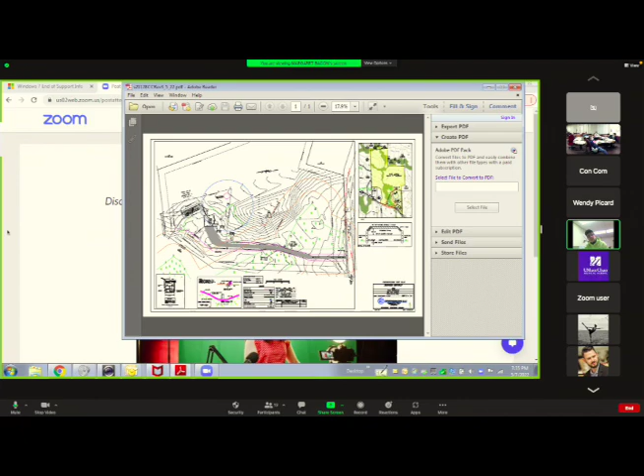So anyways, we revised the plan and moved the septic a little further away from the buffer zone, made the house smaller, and adjusted the erosion control. I think that was basically most of the comments the commission had last time. Yes, we ended up walking this site - the cart path is good, and we moved and shrunk the house and shifted the septic away from the buffer. It wasn't based on your comments, it was a design change for other reasons. Are we keeping the man cave - the well house? Yeah, still there.

Okay, we can't really hear you Margaret, you're breaking up. This is a public hearing - anyone in the audience have any questions or concerns regarding 280 U?

Board, any additional comments? I'm not seeing any comments. Mark? Do you want the bigger one? Go for it. Lady Grace, anything?

Everything look good, Mark? All right. No comment. Okay.

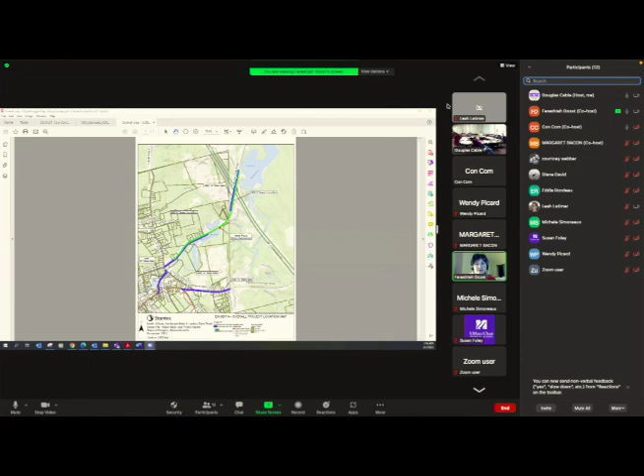Okay, so I'm going to just talk about the overall project. This is the USGS map of the town of Douglas and Uxbridge. Sorry, no, we're not seeing it. Do you think you have it on your other monitor? There you go, you can see it now? Yes, yep, thanks. Okay, so the blue lines are the water main.

The red line is the pump station, and the green is the force main, sanitary force main. So we're going to have 2,600 feet of 6-inch force main on Gilboa, and on Lackey Dam Road about 2,600 feet of 12-inch water main - that's new water main, no replacement. In the other area, there are small pipes that we're going to remove and replace with bigger pipe, but this area is new water main, and the green is 4-inch force main, about 3,400 feet, plus about 600 feet of gravity.

So this is the overall project area, and I have the detail of the design. If you're interested in any location, we're going to go into detail on those. These are all the water main remove-and-replace sections in the street with the hydrants and service connections. This is North Street. This is Northeast Main Street, again remove and replace of the existing water main, and the areas of wetland that we marked - if you have any questions or want to zoom in, Michele is going to talk about those later.

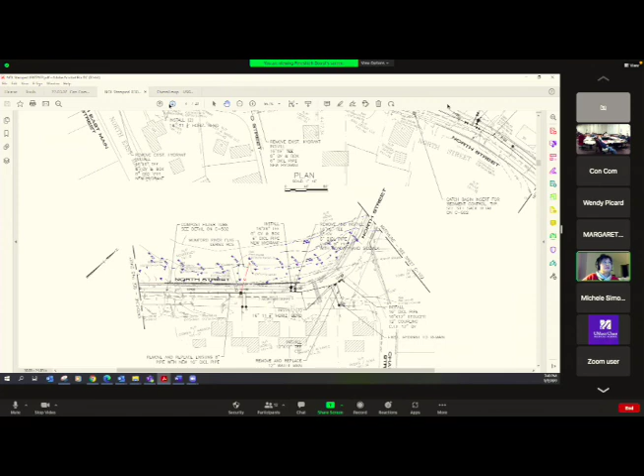If we could focus on the jurisdictional areas and the DEP comment areas, that would be great - zooming in on the applicable portions of the project. Okay, so Michele, first if you could just go back to where you were. Okay, then we come back here and I send it to you, right? If you could just show me, just go back to the Northeast Main Street that you were just showing them - we'll just start there.

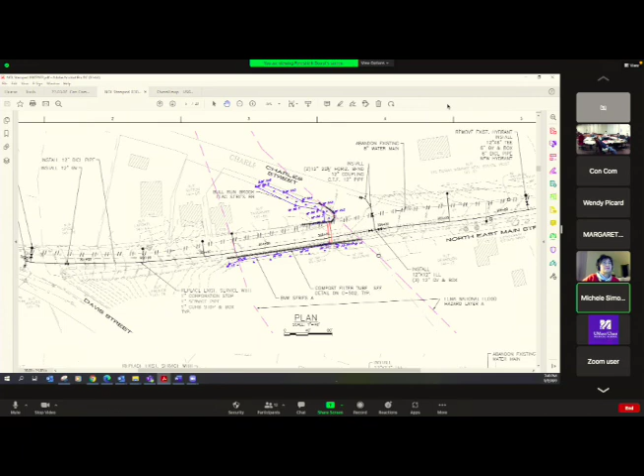Okay, so the best way to describe this is this area is just roadway work for the water main. But it is part of the notice of intent filing because it's within a FEMA National Flood Hazard Layer A, which doesn't have a base flood elevation, but it does overlap the work in the road.

While we're in this section, that's just work in the roadway with a cut and cover. Mass DEP's comments when they issued their file review was that the sedimentation control appeared to go down the bank through the river and over the other bank. That was just a little bit of a CAD error, so we adjusted that to show our intent was not to do any work in the resource areas, and that the sedimentation control will just hug the roadway and be between the resource area and the work in the roadway.

So these are revised plans that we are just presenting to you this evening. We sent them to you just a little while ago.

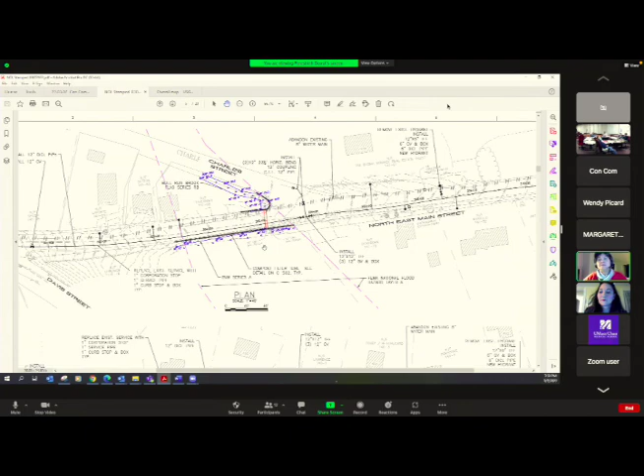Okay, questions about that section before we move to the pump station parcel? Should I move to the pump station? I just wanted to check, no questions about that area? No, okay.

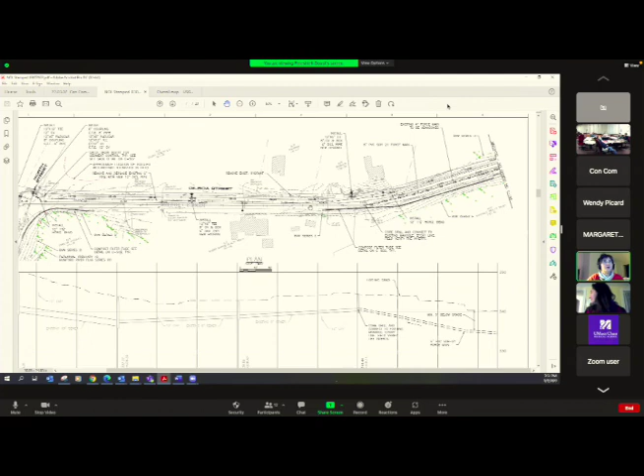Okay, so I keep going. This is Gilboa Street. We're going to connect to the existing water main and replace the water main, and then the force main for the pump station is in this area.

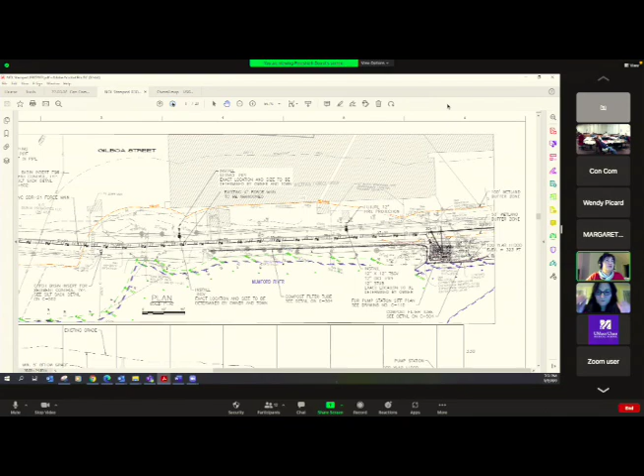Everything we did in the road, we show the profile for the pump station and sanitary sewer. Again, the force main comes all the way to the next sheet to this pump station. But since this is really small here, we zoomed to another sheet for a closer view. So this is the existing site of the pump station.

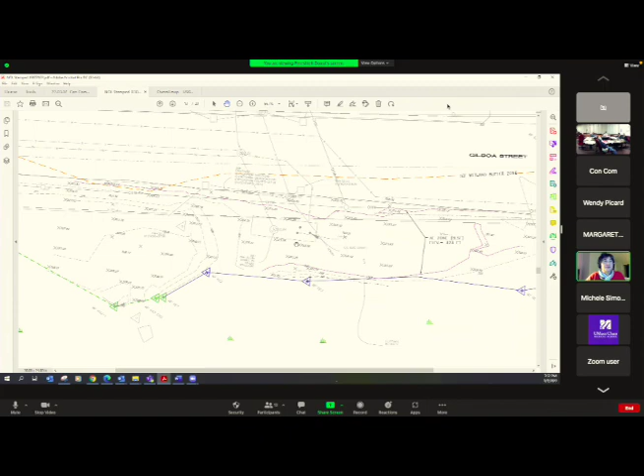Right now they have an underground pump station with electrical and control panels. We're replacing the existing pump station with a new one-lift pump station with duplex pump, control panel, and generator on the same site.

And this is the site plan for the pump station. So the existing pump station is here, and we're gonna put a new pump station. Again, these are one-lift pump stations, so we dig the hole, put the pump station in, and do the site work around this.

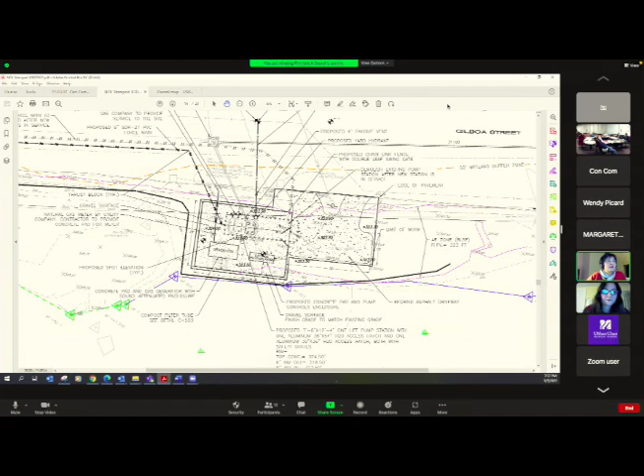The 100-year flood elevation is up here and down in this area. So in here, to make sure the pump station doesn't get flooded, we have it at elevation 324.5. So when the area gets a 100-year flood elevation, the access hatch to the pump station would be above the flood elevation.

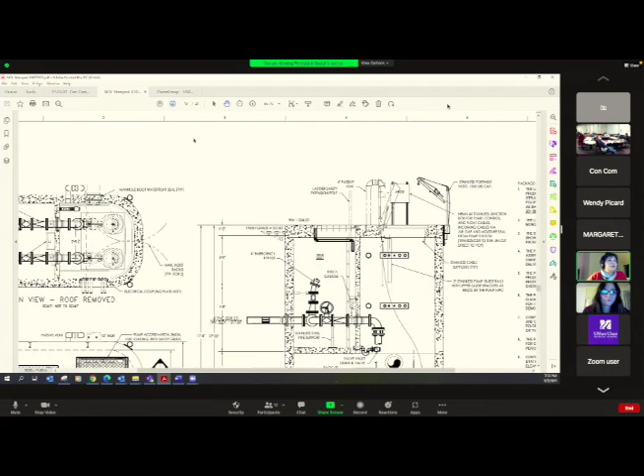And I'm gonna go here, this shows the pump station, the pumps, valve, and bypass pumping. And what you see would be only like this, this is the existing.

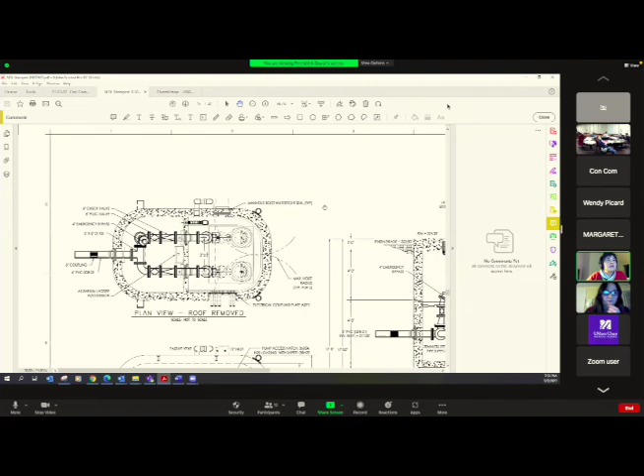This line here is existing elevation. Right now it's 323.8. We're gonna have this 8 inches above that, so the water doesn't get to the pump station during the flood. But everything else is underground. It's precast concrete, everything's all set, tested, and they bring and put it in there.

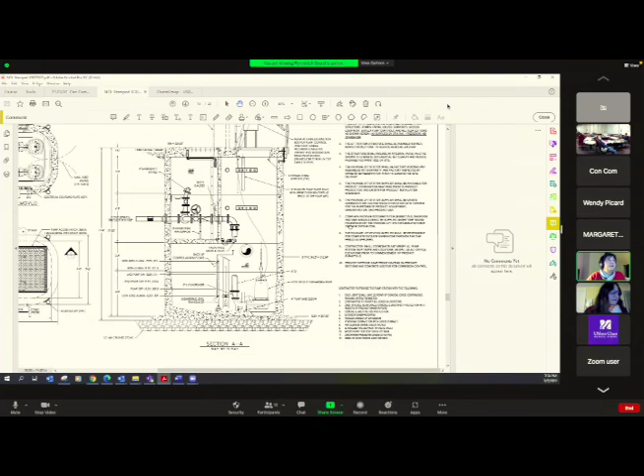This is all in a building though, is it not? No, no buildings, all underground.

If you go back to the last slide, can you tell me what the big square is that's around the whole generator? Oh, this is the generator, we're gonna have an above ground generator. And this is the control panel, and what you see around it is the fence. We're gonna fence the area and there is a gate. So no building.

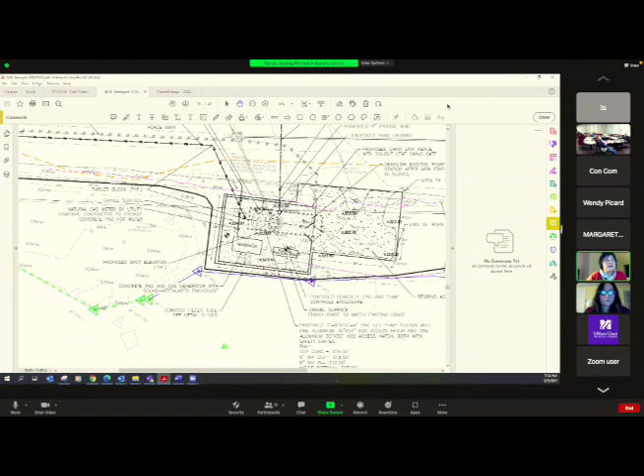Yeah, and that was one of DEP's comments, just to clarify that. Would you like me to read the Mass DEP's comment into the record, Madam Chair? Sure, okay.

MassDEP's comments on their review letter stated that the project narrative mentions 144 cubic feet of permanent loss of storage in bordering land subject to flood, BLSF, and asked us to update the impacts listed on page 3 of the NOI, providing additional information on how the project conforms to 310 CMR 10.57 subsection 4 performance standards for BLSF, including compensatory flood storage under 310 CMR 10.57 4A. Our response was that, for lack of a better description, we had a typo in the narrative.

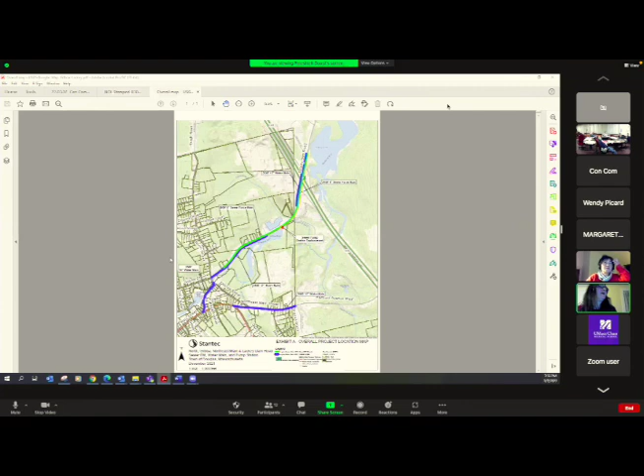The narrative was presented incorrectly, so we want to clarify here in the public hearing that there is no fill proposed in the BLSF. Luckily in this area FEMA has a base flood elevation, so we know with certainty that the BLSF is at 323. There's no proposed fill in that area, so no compensatory storage was needed. We verified that in our memo, and the plans you're looking at are our revised plans, showing the 323 contour and that our work is outside the BLSF with no permanent fill.

But there is grading and there is a new driveway, it looks like. Is that a paved driveway? And how close is that to the wetland?

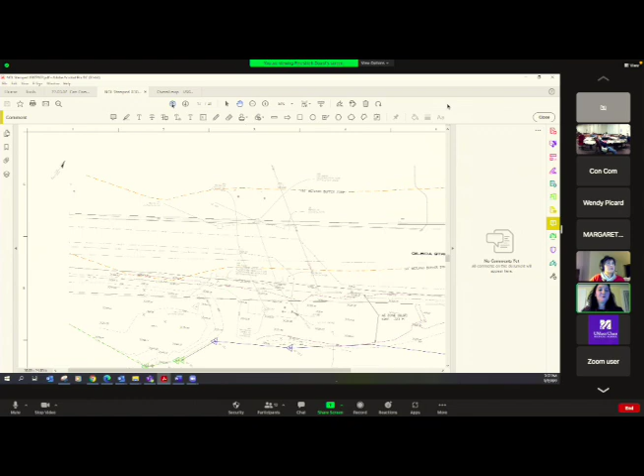Sure, Christian, can you zoom out? I'm going to give a bigger overview of the resource areas we're dealing with here besides the floodplain in this area. Can you zoom out just a little bit more? I just want to give an overview since we zoomed in quickly. Okay, that's a good place to start. So you see that dense black square there? That's our pump station, and what you're seeing here is the Mumford River in blue.

There's a portion of it that is impounded, so it's just got bank and a little bit of bordering vegetated wetland in places, but below the dam it resumes riverine characteristics, so it has a mean annual high water line, which sets the 200-foot riverfront area. That reaches across Gilboa Street onto the next parcel, and there's actually an overlapping riverfront area. Can you page to the next sheet down, please?

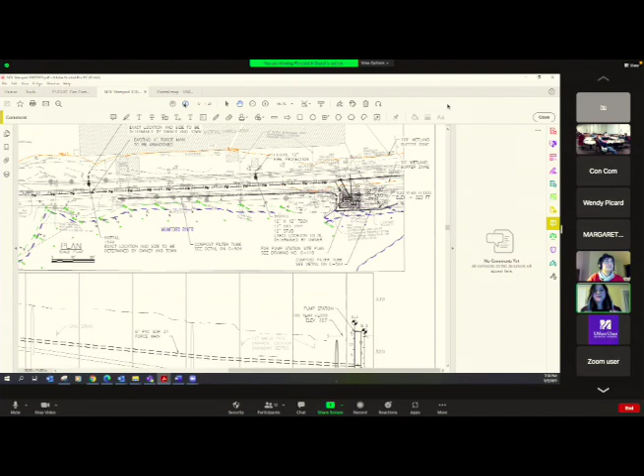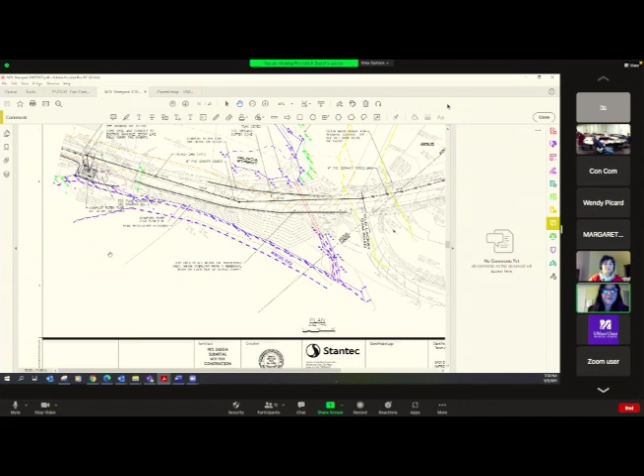There we go. You can see a portion of Gilboa Brook runs through, so there's a confluence of the riverfront area. We're definitely in the riverfront area for the pump station, and I showed you where the BLSF is, and then there's of course a 100-foot buffer zone to the bank of the Mumford River. So that's where we are on that parcel. Mark, does that answer your question?

So as far as the additional or expansion of disturbance in that area, what does that entail? Are we considering this a temporary disturbance? No, I think the parking area is permanently associated with that site. I think that's Mark's concern. That is my concern — right now there is a parking area.

I'm looking for any additional expansion of that parking area. This is where they drive and park to do work at the pump station. Right now we're proposing a regrind asphalt driveway for that area. It would be easier for the town to plow and just park there. It's about 10 feet, maybe, away from the river in this area.

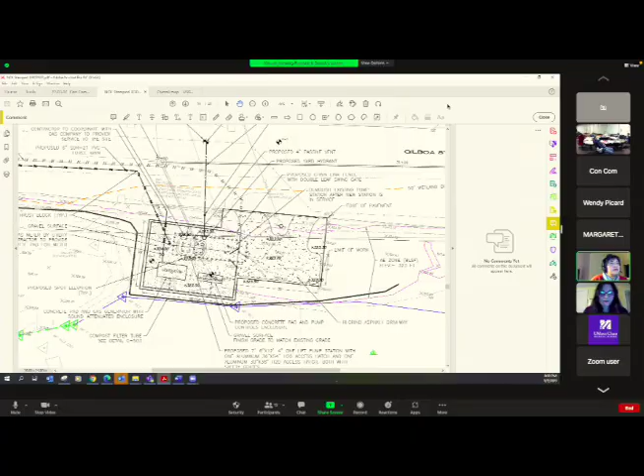So is the existing driveway or parking area getting expanded beyond what is currently disturbed? No, it's just the same type of footprint. We're going to leave that — if it's a grass area or dirt, we're not going to touch it. This area stays all the same; just where they come and park the car, the town would like to have a regrind asphalt driveway.

And at the pump station site, we're going to put a gravel surface — picking up 12 inches or 8 inches of soil and putting gravel down, so it matches the existing grade. We're not going to fill any area. Is that completely within the fence? Yes, just within the fence. Outside the fence it's going to remain as is, with some grass area and natural vegetation — we're not going to touch that, just put the gravel within that area.

So is that called out on any of the plans? Yeah. Is there a detail of the regrind — is that C110? Yeah, I've got it here, I think. So do we have a big set? Mark, there's a big set there. If you go to C110, you can see the site plan for that. It's hard to tell the existing versus the proposed.

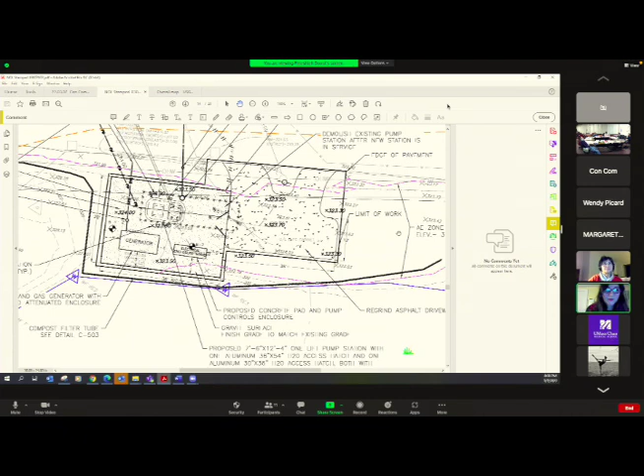We did include a stormwater management checklist and plan stamped by Gina Britton, who's the professional engineer, the engineer of record on it, attesting to no further runoff. We haven't proposed any proprietary swales or anything like that to formalize the area.

And I do have the numbers for you. So for riverfront, again there's no BLSF impacts, but there is a disturbance of 3,700 square feet to the riverfront area, and that would be inner riparian zone disturbance, that would be the riverfront areas to Mumford River.

Okay, and the alternatives analysis was submitted? Yes. Okay, and DEP obviously did not have an issue with that, so that's good. One thing, the Thresher can cover this in more detail, but this new pump station is an upgrade with new technology, and it's going to have protections, it's kind of got all the updated engineering for resiliency, when it comes to protecting the town's pump supply. And Percy, can you speak to that a little bit more?

Yeah. This is the pump station we're gonna use. This is the precast pump station, and it's gonna be waterproof, and the pump's gonna be in here, and the pipe with the force main. The only thing you see out there is that 8 inches above the ground with the access hatch and the vent. And for removing the pumps, there is an access hatch.

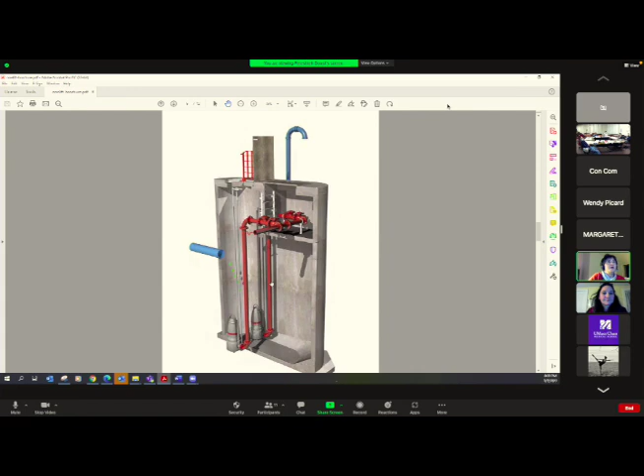So when they drive here, the truck comes back up, and if they have to remove any of those pumps for repair, they can just pull it up and drive back and take it to repair.

And this is, the old pump station, the pipes are very old, the pumps, and with lots of new warehouses in the town that they need water and sewer, so those pumps could not pump the sewer. So we replace it with bigger pump and generator backup and the new system pump station.

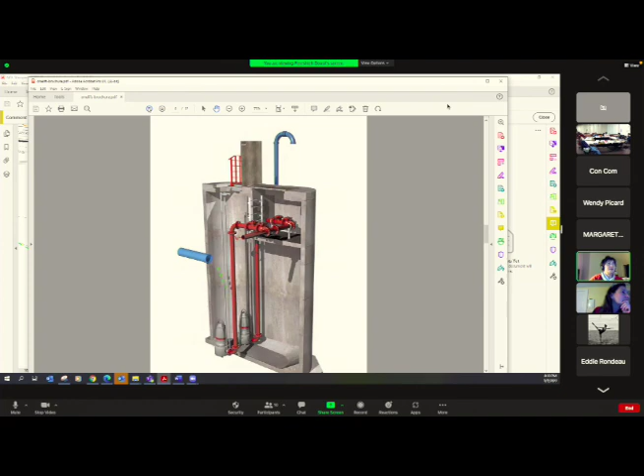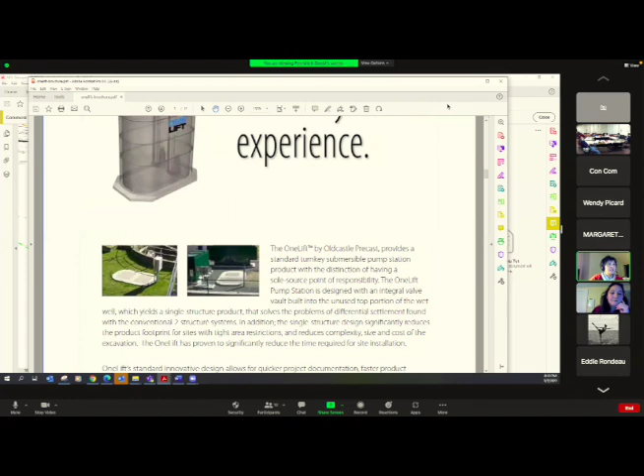And that's gonna be OneLift pump station. That's gonna go in there. Everything will be underground. Then what you see would be just the hatch with control panel. This is another project, of course, but that's gonna be what you see outside.

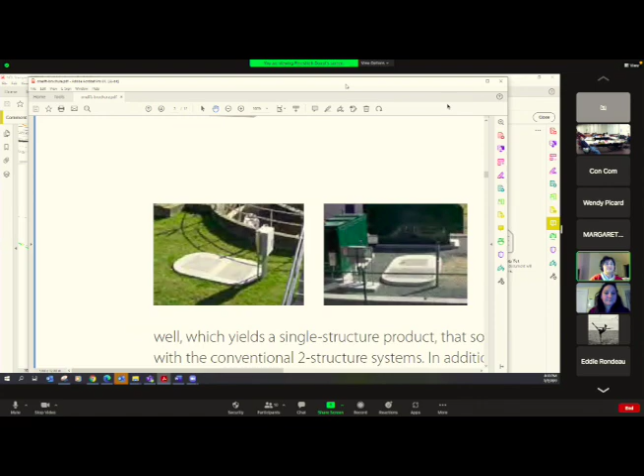Okay, so as far as the increase. And this is the detail. The increase of the impervious within 10 feet from the bank. Can we go back to that? So your justification for that, yes.

My understanding is that the water and sewer department would just like that for sort of a formal area to park, to maintain, for easy access and egress back out onto the road. It is a pretty busy road. Exactly. It was hard to put the gate in here for the trucks to come and back up because it's a very busy road, and that's what they use, and they own this lot.

So this is per their recommendation that if you can use the regrind asphalt, so when the truck comes, their pickups usually, and turn around, it would be a nice area to park, check on the pump station, and have the gate. Right, so it's a 13 by 35 foot. How many people are going to be checking on this pump at one time? It appears as though it's a parking lot.

So I just want to understand, in accordance with the Wetlands Protection Act, what is your justification for getting so close with regrind versus today it's a very small gravel area? Yeah, in case they have to come and check on the pumps and maintain the generator or electric control panel, usually someone from the town definitely needs to come open the access hatch. But does it need to be so wide? The electrical engineer from our office or someone else's, and mechanical for the pumps.

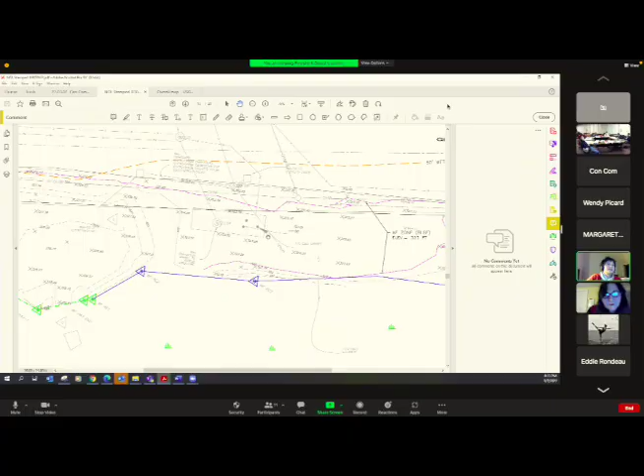This is the existing, and again, we don't have any places to show that area because it's just the dirt and existing. This one is gonna be like. Well, you showed a picture of it. You want to bring that up? Yeah, I was gonna suggest the same thing. Bring the picture up. This.

I've been to the site. The main water line and bank is right down below the tree line, where you can see that's a fairly steep bank. And just back to your question about concern over the say like a crushed stone versus the asphalt, the regrind asphalt that's being proposed, the thought is just that the maintenance that is accompanied by the crushed stone and just kind of having to continually maintain it, possibly getting pushed closer to the river. There will be a fence there, but that's just what the town wishes to do. So that's what we proposed to make the operation go as smoothly as possible.

Okay, so how are we protecting the bank from the runoff? And why is the parking area so large, for probably 6 cars to park there at one time? Now, is this also gonna be fully enclosed with a gate?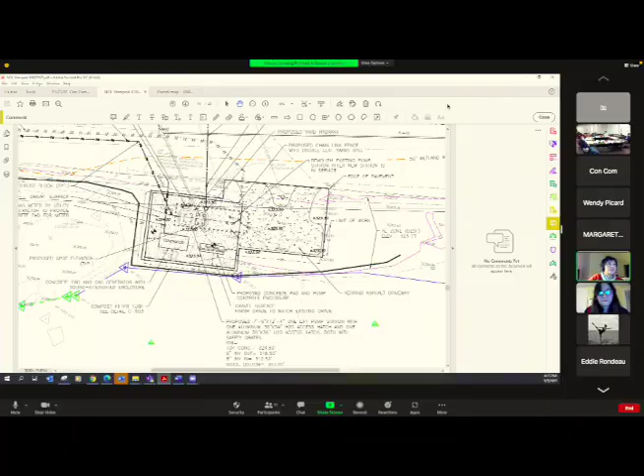With a double gate? Yes, this gate will be closed all the time. So the parking area you're referring to is not gated, is not fenced in. So anyone could park there if it looks attractive. Well, exactly, I can tell you they all park there now.

So that's actually where all that worn out area is mostly from other people parking. They pull in and they actually drive further down, closer to the area. And that's why.

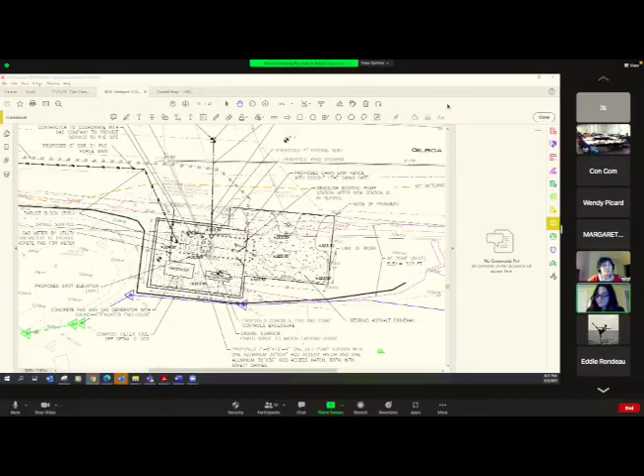There's a catch basin right on the road. And the road is curved, so you have to hop the curb to get into this driveway. There's no curb currently, neither off the side. Oh, okay, it was designed to be maintained from the road.

So you want that berm along the road to stay there - like 4 or 6 inches. And then around this area, you need a berm also? No, not along there, just on the stream side, parallel to the river.

We'd like to keep the water from going directly off the parking area towards the river, to prevent erosion and get some filtration before it reaches the river, for whatever reason. We'll have to look at some kind of swale and look at the grades.

So we can grade this to go to that catch basin - is that what you want? No, we didn't say that. I was just saying there is a catch basin there, and if you can use it, sure. But we're also saying it would be okay for the water to go towards the east, just off the end of the parking area. I would probably recommend towards the east because that catch basin goes directly to the river. I wondered that.

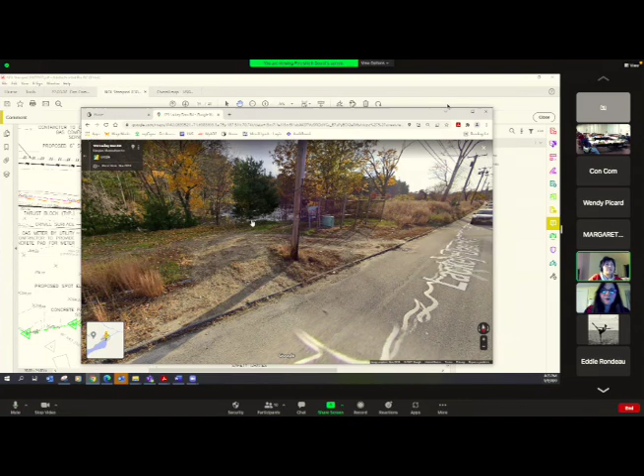Shrubs or anything. How do I know that, looking at that plan? Because I don't see any of those trees on the plan. How can I be confident of that? Because those trees are outside the limit of work. Yeah, but they don't show on the plan, and the river is right there. I don't understand how they can be outside the limit of work, when the river is 5 feet away from the fences.

Sean? It is a little tricky to the eye, that picture, because it's a very steep slope, so some of those trees are kind of like right at the edge, and then a little bit down towards the river.

Well, can you add those to the plan for us, please? We can approximate it, sure. I don't want an approximation, I want you to add those trees to the plan. Well, or she could do all existing vegetation to remain in these areas and make a note.

I think you were saying the area of disturbance is not affecting any of the vegetation in the immediate area. But you could even do like some kind of call out for labeling and say there's no, but you could also put on the plan, no tree clearing, no vegetation clearing, as a note. And that could be a condition also. The survey just didn't pick up the tree line in that spot, so, but yeah, absolutely put that kind of note here.

Question. All right, my next point is that on the eastern corner of the fence, it seems like it's hanging over the bank towards the river. Is there any way that that fence line can be moved away from the river bank?

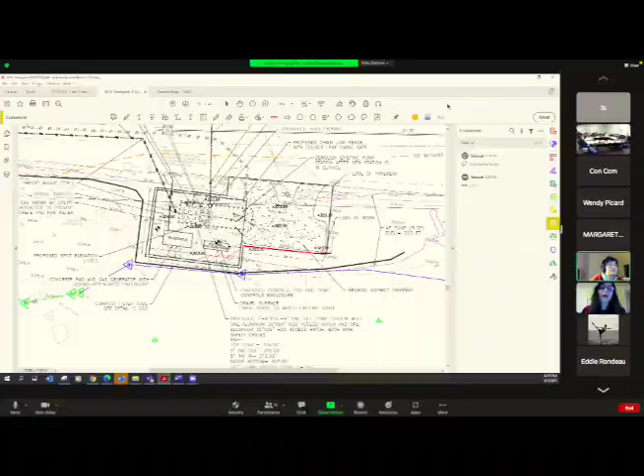Is the fence allowed to have like a little jut in it? So I was about to say, can you angle the fence at 45 degrees in the back instead of squaring it off? Yeah, that's what I'm wondering, if that's allowed. Just come across on an angle to where the gate opens. Sure, something like this. Correct, yeah, right. I thought that was a code thing. It probably is.

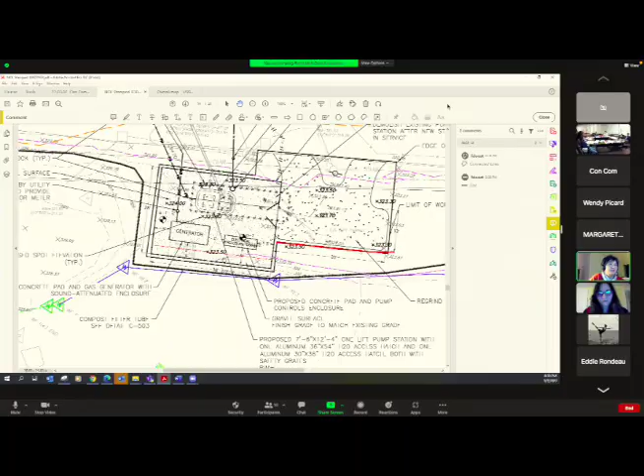Yeah, I'll stay in my lane with wetlands and permitting though. Again, that 5 feet from this side and this side, I'm sure that needs to be 5 feet too, so I can't have a job there. But again, I can talk to the electrical engineer about this code, the minimum requirement, and see if we can, because we haven't built it yet, so this is final design. We can move this if needed.

So back to that corner. Is it hanging over the bank? Is it at the bank? No, I think this is kind of flat area, 322, the slope starting this area. Yeah, we have, most of it's 2-foot contours, but we have 1-foot contours in that area due to some additional survey specifically for the flood zone. So the topo is a little bit tighter in there, and it's not actually hanging over the bank.

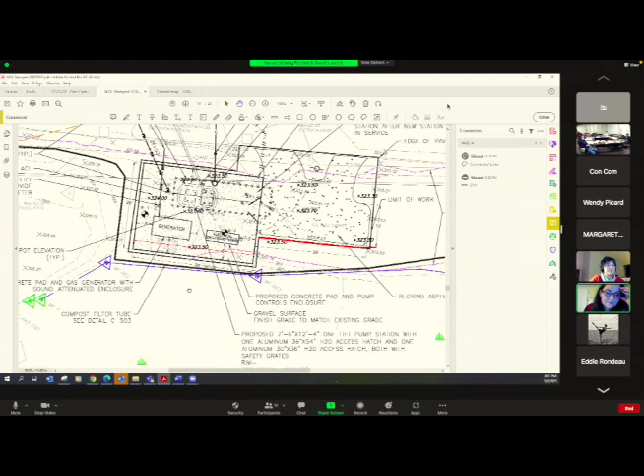How many feet are we from the bank to the fence? Because there's also a limit of work shown in that dark solid line, and then the fence is within there. Yeah, it's about 5 feet. Yeah, it's just limited space to work with in there, between the roadway and the river, we're kind of jammed in.

So wait, there's 5 feet between the generator and the fence, and you're telling me there's an additional 5 feet between the fence and the edge of the riverbank? Uh-huh. I think you changed the topos? You changed the scale? Yeah, so if I measure 5 feet, you're into the wetland on the 5 feet from the fence.

I'm gonna have to get... See, if that's 5 feet from generator to here, from fence to there is another 5 feet. So from this edge to generator is 10 feet. And again, don't forget it's a big drop here. Oh, vertical. Okay, put the vertical drop? Okay, 1 second, please. There it is. Good job.

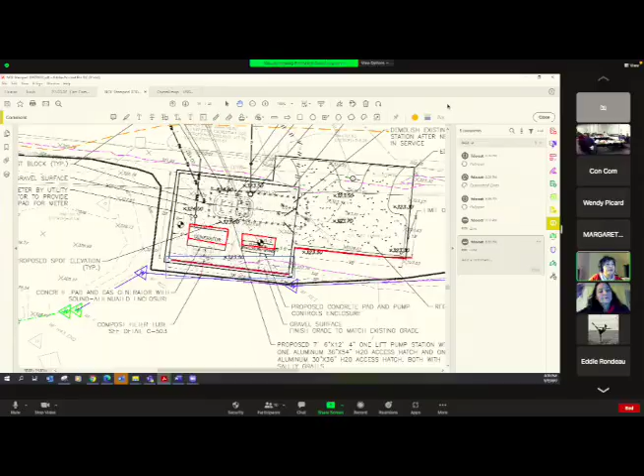Well, we need to tell them exactly what - so anything better than where the fence is located right now is good? I'd like to see at least 2 feet better. Okay, they need to check with the electrical contractor and the code. We've asked them - so if we move it like 2-3 feet closer, and then move these two.

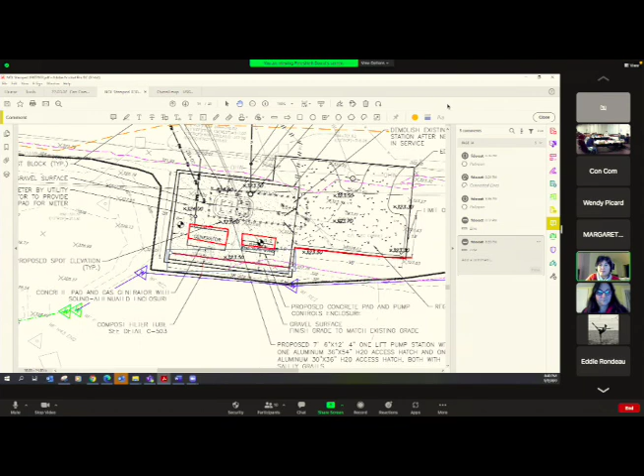And then probably I'm gonna move the gate - I've heard they're not interested in the sliding gate, so I can move the gate further so it doesn't hit this. I think it's drawn - looks like there's room to move the gate too. Looks like - why did you just move it like this? Yeah, if you're just sliding it over to the right, as you're looking at it. I would be happy with that, yes.

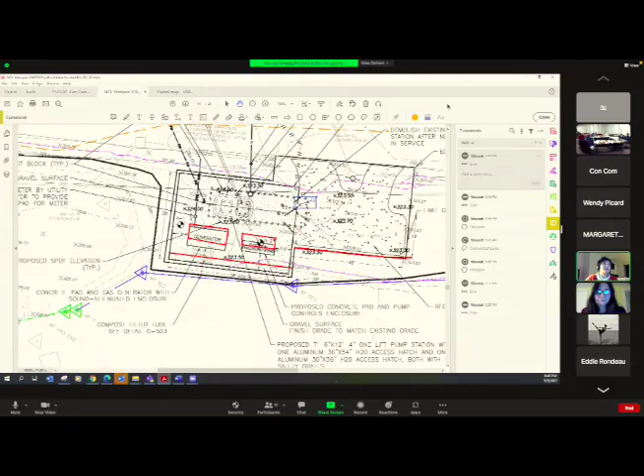Okay, and then have the gate swing out? You can, do you want that? I'm just saying it would alleviate the issue of moving the electrical van, but I didn't know if that was another code thing - if you can't get in or out in the event of a fire, you're outside already I guess. You're already outside. Yeah, I don't think you'd jump the fence, yeah, so outswing maybe.

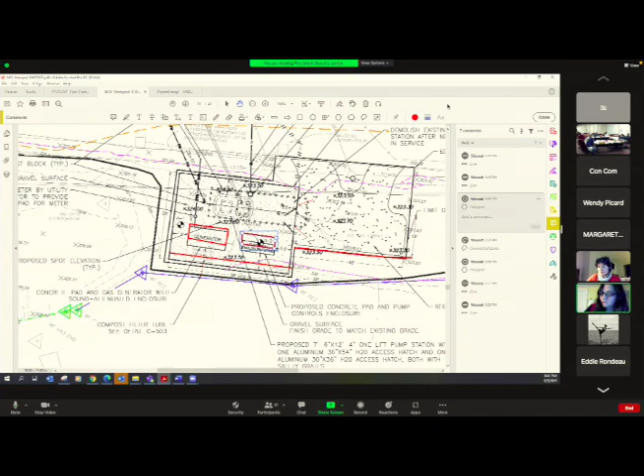Yeah, we can do outswing and then move this further and move the fence 2-3 feet. There you go, I don't have a problem with that. So why don't we just condition moving the fence 3 feet? And do 10 by 35, paved instead of asphalt, right? Instead of regrind - I want to see what the pavement, the first one, looks like. I feel like we've gone through 4 different things we're asking to make changes on, so I'd like to see it before I want to just condition it.

I don't see, it's pretty straightforward. What was the other location? Drainage, talked about berm, talked about Northeast Main, fence, talked about shifting items within their plan. There's a lot going on there.

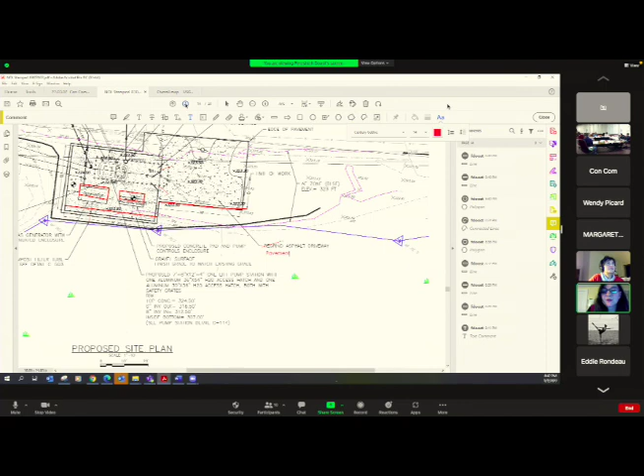Can we go to the other sensitive area, please? We've got to wrap this up. Madam Chair, do you mean the Northeast Main Street? Yes. Could you navigate to the page above this one, at North Main Street, or Northeast Main Street? Right at the corner, yeah, there we go.

And this is all the roadway work, I think. No, try the first one. Okay, so it's just, okay. Open that one more. Nope, I was so hopeful.

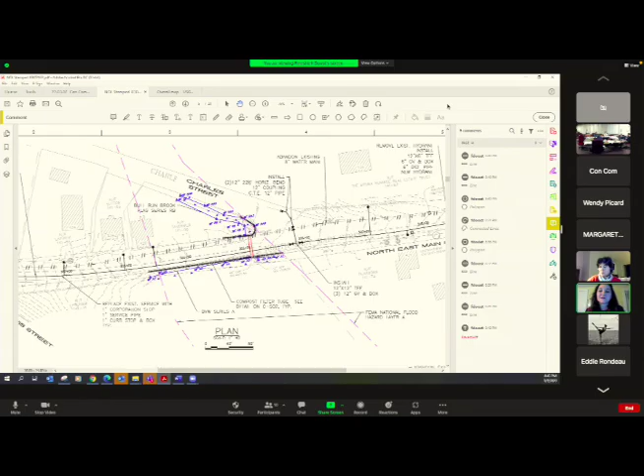Are you meeting to do a week before or two weeks before? Week. Thank you very much for your time. You're welcome, thank you. It's two weeks before right now. Stuff. Yeah, I know, okay. Thank you, everyone, good night. Thanks, Bob.

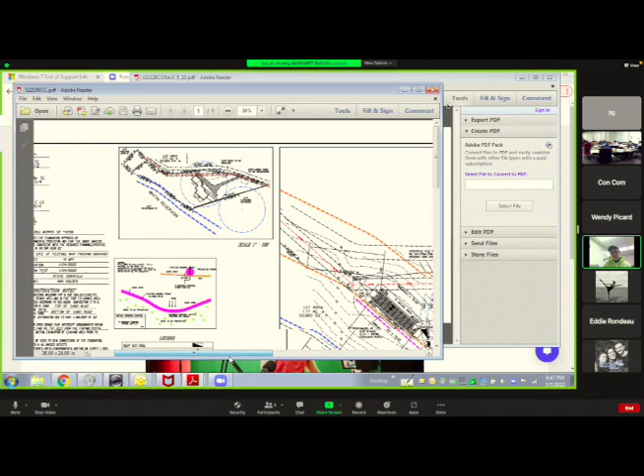This was included in our packets. Yes. Can you see that okay? Yeah, yes. If you could zoom in, that would be wonderful. Okay. Sorry, I cannot see a thing. No, it's better, a little. Okay, you all set? Yes.

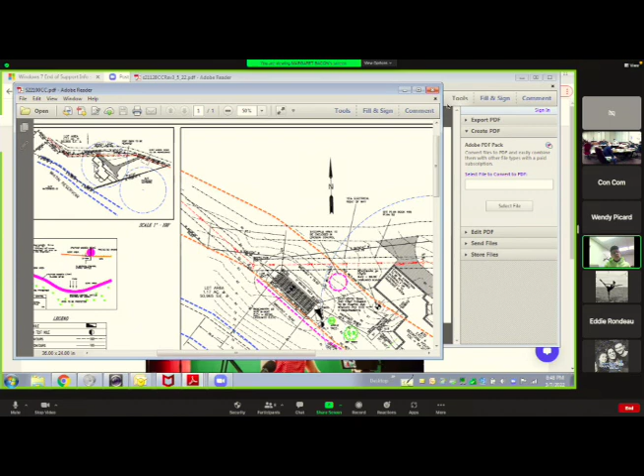Just on this 100 scale up here, just to show you, because I couldn't fit it all on the 20 scale. The existing field is up here next to Shady Lane. The D-box is right here. The force main goes underneath the garage they built years ago, with the tanks, septic tank and pump chamber back here, okay? So that's the general overview.

So basically, we looked at, here's the Whitin Reservoir, here's the existing tanks, pump chambers, force main underneath the garage, and into this D-box. Well, the system right now is in failure. The leach field is no longer absorbing any of the wastewater. So the pump chamber pumps up to this D-box, but then the D-box just kind of spits it out under the ground here. So we looked at replacing the existing system where it is, but the only problem is I have this old force main that is underneath this existing garage, and when they built over the force main years ago. So the only other option, and then these tanks right here are buried by about 10 feet.

So the other option would be to pump around this house and up through here. There's a lot of rock, it would make trenching very difficult. It just didn't seem like a conducive repair fix for this existing system.

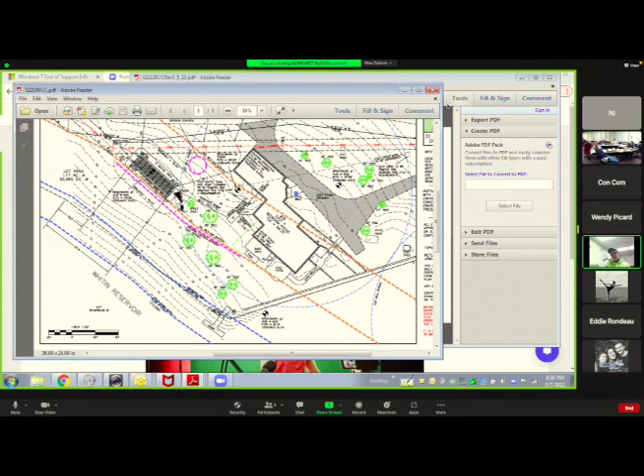Okay, anyone in the audience have any questions or comments on this hearing? No, looks like everything's in order. We have the DEP number. Board? Questions? Eric? All right.

Mike? Mark? What's the red line at the top of the plan? Is it D something W? It's the overhead wire. Overhead wire?

I have no questions, thank you. Oh, welcome. I'll entertain a motion to close.

So moved. Motion made by Art to close the public hearing. Second by Mike. All those in favor? Eric Carrick, aye. Art Poppy, aye. Mike Greco, aye. Mark Martin, aye. KG Dudley, aye. Okay, I'll entertain a motion to issue the order.

So moved. Motion made by Art, second by Mike. All those in favor? Eric Carrick, aye. Poppy, aye. Greco, aye. Mark Martin, aye. KG Dudley, aye.

Okay, you're all set. Hey, do you know when I could get the order of conditions? Steve, did you draft that up? Is that the signable one, the yellow one? There's a pile. Oh, you'll have to call tomorrow, ask for Jen.